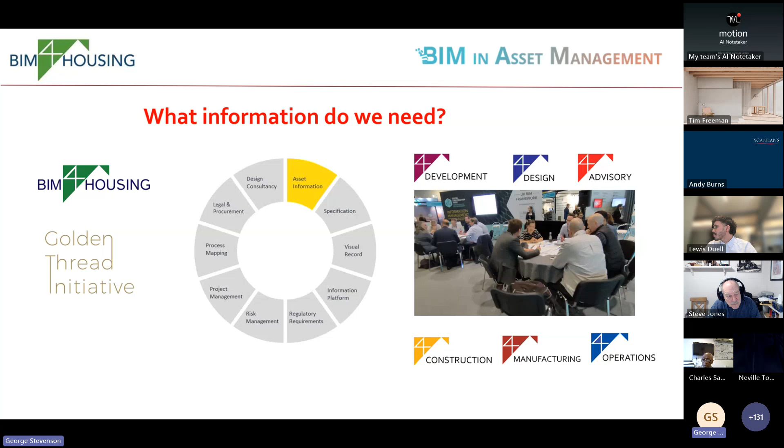So under those circumstances, we've run hundreds of workshops over the last 5 years, where we've got, for example, all those people around that table there are manufacturers. We've got designers coming together, but pretty well all of these have been done on Teams, and they're all recorded and up on the website. So if you're interested, that's the place to go. Very rich set of information.

One of the big challenges we've got with the new regulations is there's no explicit requirements, and that means we've got lots of experts having their different interpretations of things. So what we're really trying to do is make it so supply chains can get more consistent guidance, and we can do that through reusable data libraries.

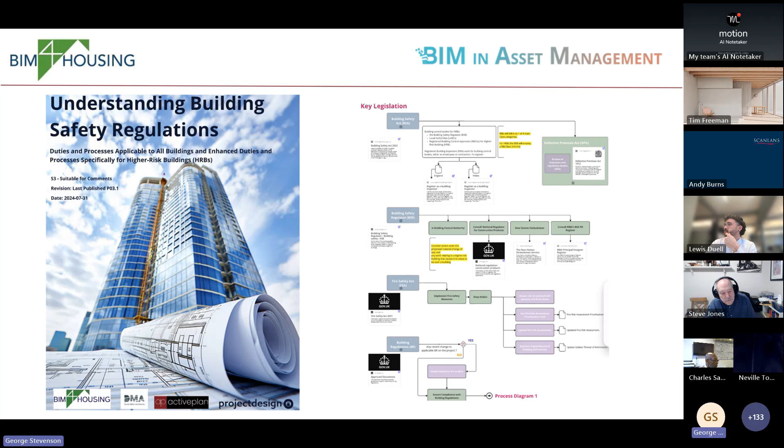What we've also done is set up, or the team has set up, a Miro board where you can go onto this and understand the regulations and also ask questions of the other experts. We've got basically almost 100 people involved in that. If you're interested in getting involved and using the Miro board, just put Miro in the chat and we'll come back to you on that.

What we also did, we used this methodology to identify what the assets are doing, what risks they're mitigating, what do people do to them to stop them from working, and what information we need to know about them. We did this on a deep dive basis for 12 key safety critical assets, and we've kept that information up to date, refreshing it every couple of years.

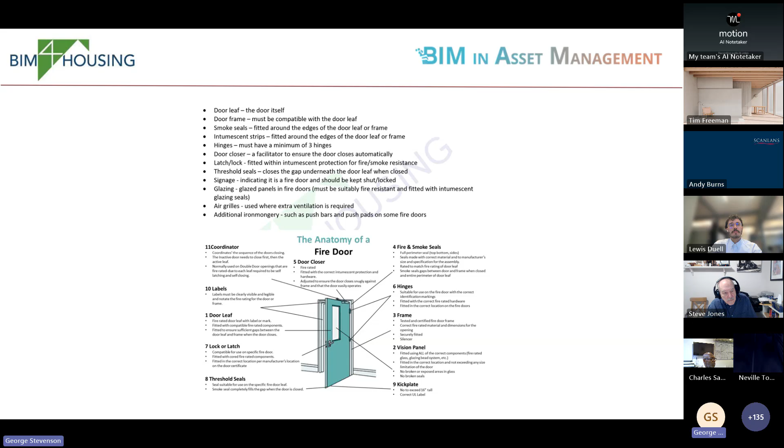We've just done it. We had a team working on that in September and October, and that's now been published, so that's up on the BIM for Housing website. The sort of detail we've got here is for each of the asset types - we've got fire doors, with detailed information that I think probably nobody else is providing.

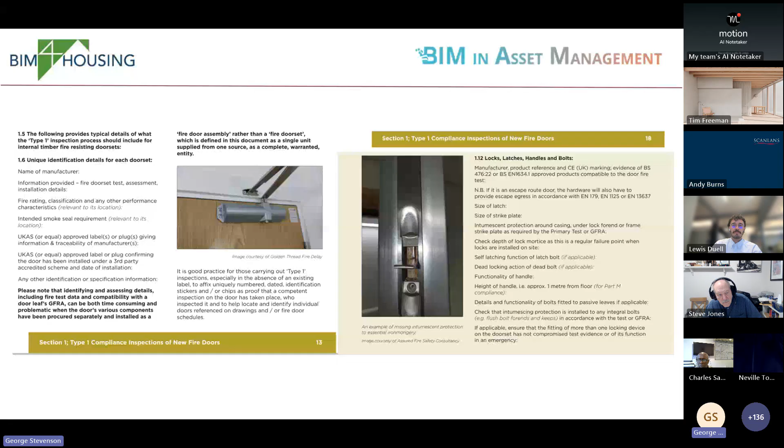What we've also done is looked at things that could be standardized, like fire door inspections, being able to identify in a standardized way what good looks like in terms of a fire door inspection. We've recently been working on the same for fire dampers, fire stopping, and cavity barriers. If you're interested in any of those standardized information sets, you can go and download them from the BIM for Housing website.

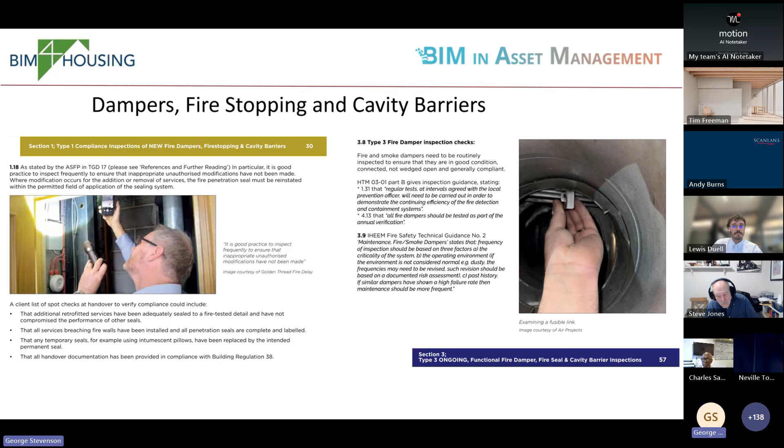But also, if you're interested in understanding more about how this glues together, I'm going to show you something now. One of the big challenges with most of these assets is knowing where they are in the building. We regularly find that even on brand new build projects, the asset teams have to send surveyors in to do manual surveys to actually identify where the assets are, and that findability is a big issue which we're trying to crack.

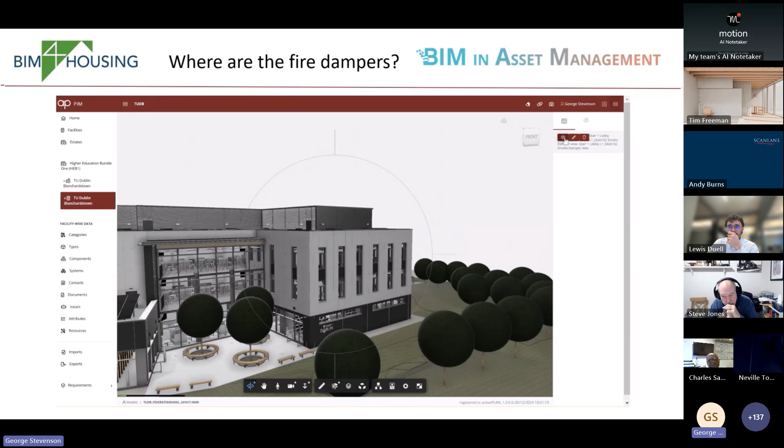So here, for example, we've got a few different software companies supporting the contractor and the asset team, and this is answering a specific question: where are the fire dampers in the building? We've got an integration with the Autodesk platform, and we've also got it integrated with the manufacturer's data about the individual dampers that have been used, being able then to identify both what the damper is and also where it is in the building.

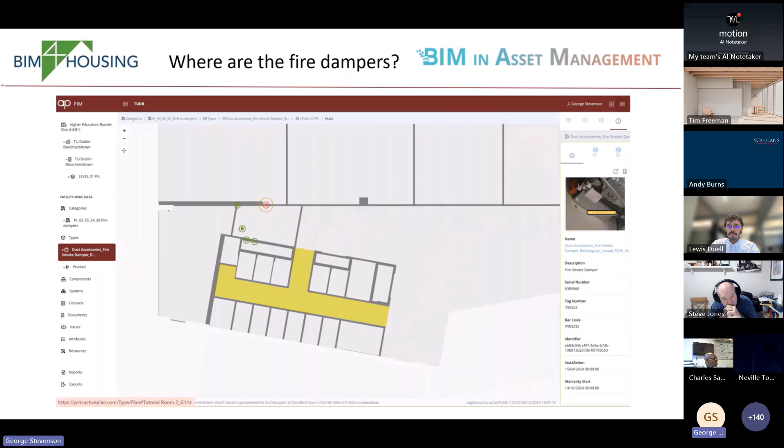So this is a very simple view of where that damper is, and by connecting it through to both the manufacturer's information and the asset information in the maintenance system, we've got something that can relate better from a compliance perspective. What we've also got is a link through to Open Space.

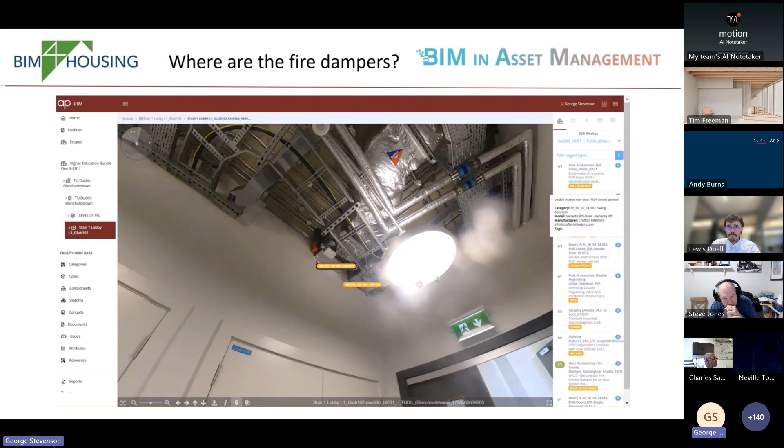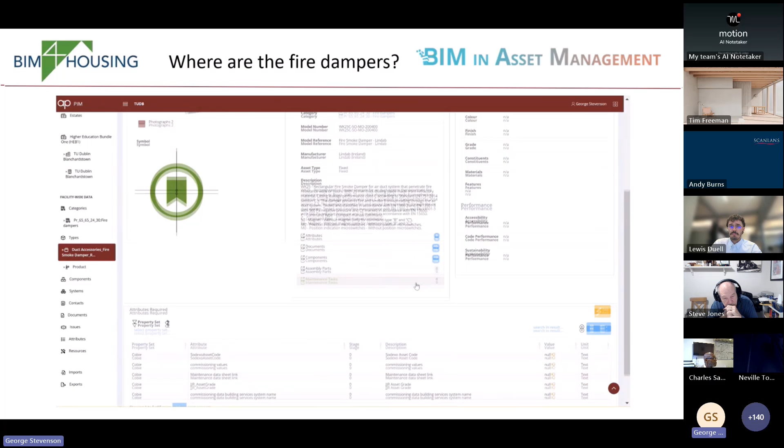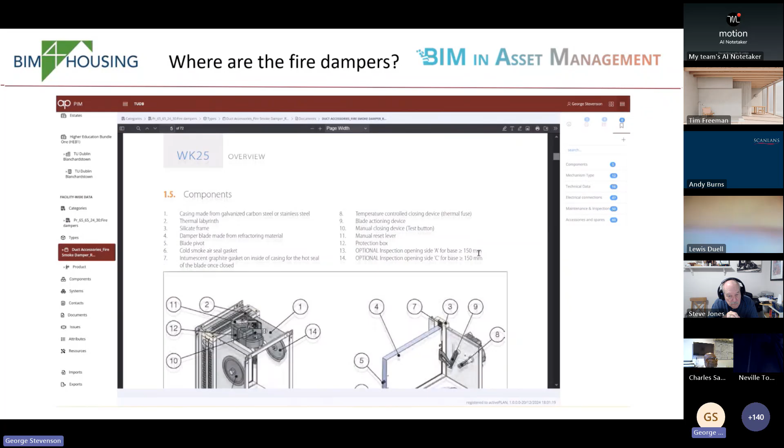This Open Space application captures 360 photography for construction purposes. Now we're really using it for asset management, so we're reusing the same information several times. We can also capture information that's been put into SharePoint for the O&M information, including the manufacturer's documentation, which we're tying back to product libraries that the manufacturers can then keep up to date themselves.

So the principle here is that what we're doing is capturing something once, doing it well, verifying it, and then making it available to be used many times. What we've now done is connect it back into SFG 20, which is the UK standard for maintenance tasks, so we're pulling all of that together.

So that's, I think, a good example of how we can bring together various different software companies and service providers to work in a joined up way. And that's the principle we've got with the Golden Thread Task Force. So I'm just going to explain that briefly.

The Golden Thread Task Force is to bring together a number of different software platforms and also people providing services - surveyors, contractors, people doing inspections - and they can then form tested solutions together. Therefore, clients and people that own buildings can come to them and bring together both the need and also what that solution is.

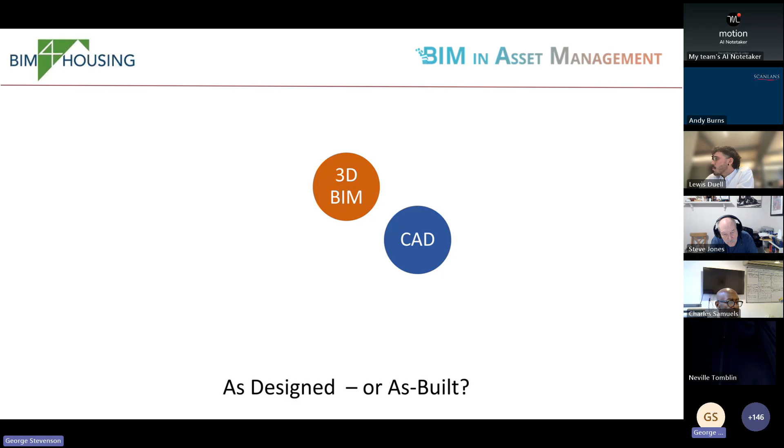The process we're operating is really trying to address the fact that most BIM models are as designed rather than as built. The challenge often is that if there's a BIM model and CAD data, the CAD data may or may not have come from the BIM model. You might have some COBie data, hopefully some good O&Ms, and maybe 360 photography. But the challenge is that they're not connected.

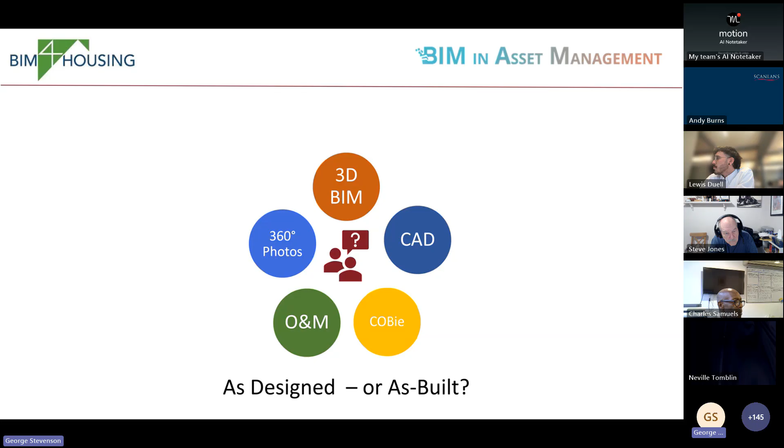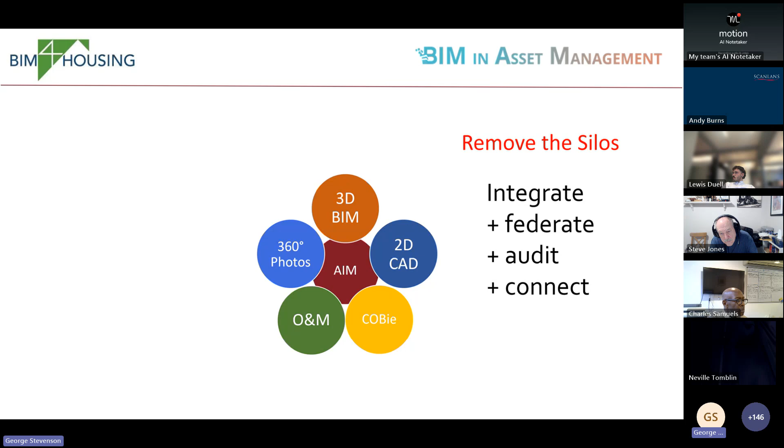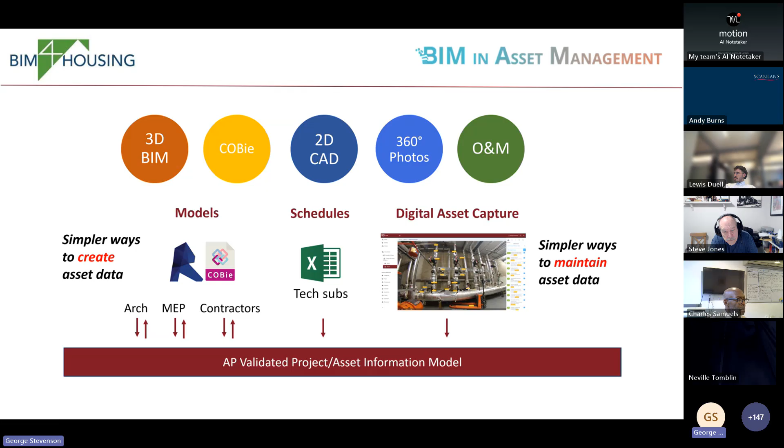That means the only way of checking that information is to do it manually, and the result is it often doesn't get done. So what we're doing is bringing those things together through integration so we can remove the silos and make stuff much more findable, joining up the information so it can be verified, maybe even using 360 photography, so it's quicker and easier to maintain.

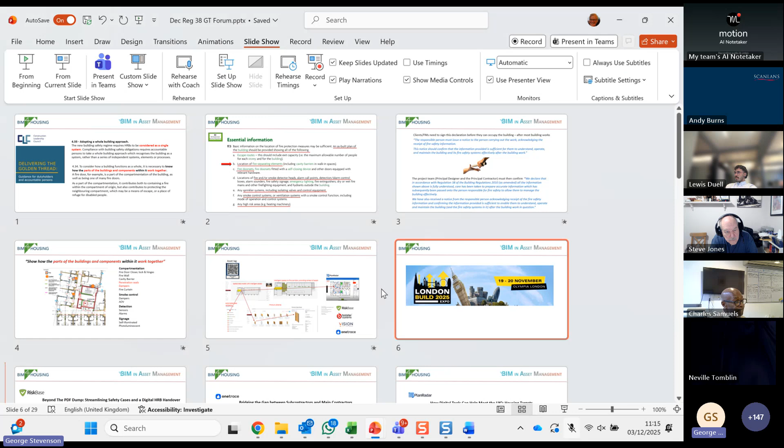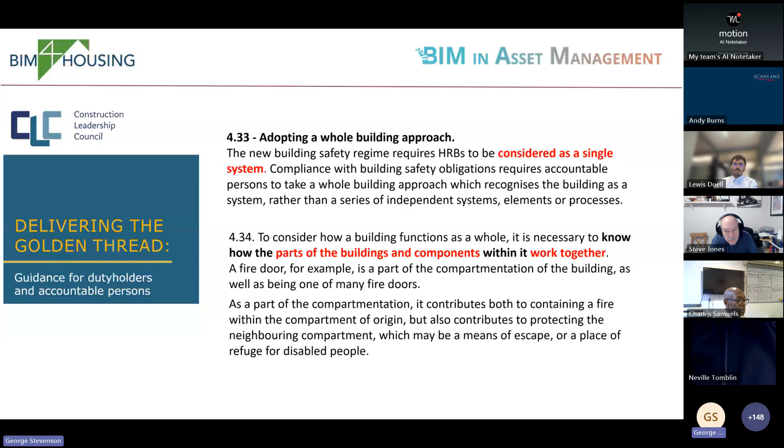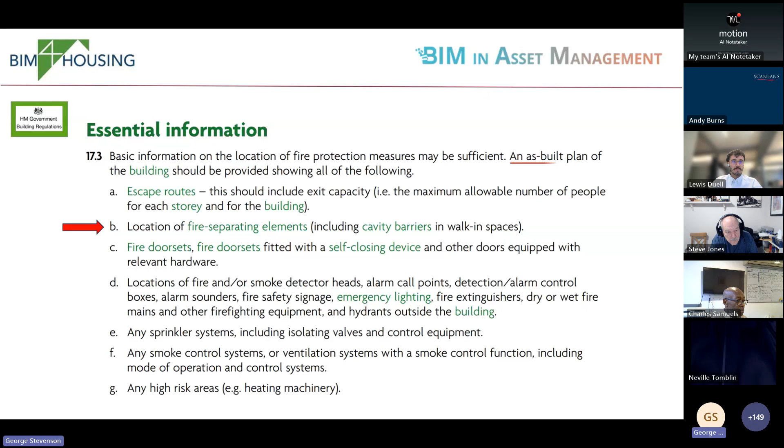I'm just going to skip on now to a case study. One of the big challenges is that a lot of this information coming through should be complying with the Golden Thread, which is really a concept of bringing together key information. Regulation 38, the fire and emergency file, is absolutely critical to the safe management of the building, but a lot of people don't appreciate that by law, the landlord has got to sign to say they've received it.

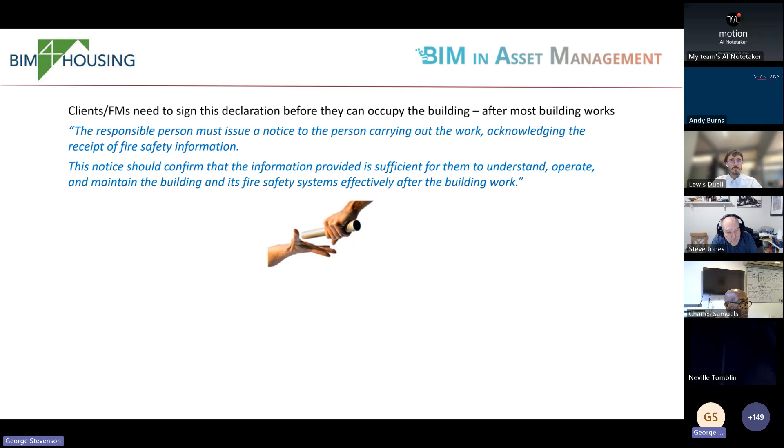The landlord has got to sign to say that they've received it, and the contractor has got to sign a declaration to say that they provided it. We're certainly finding that's not necessarily really happening. Now, why is that important?

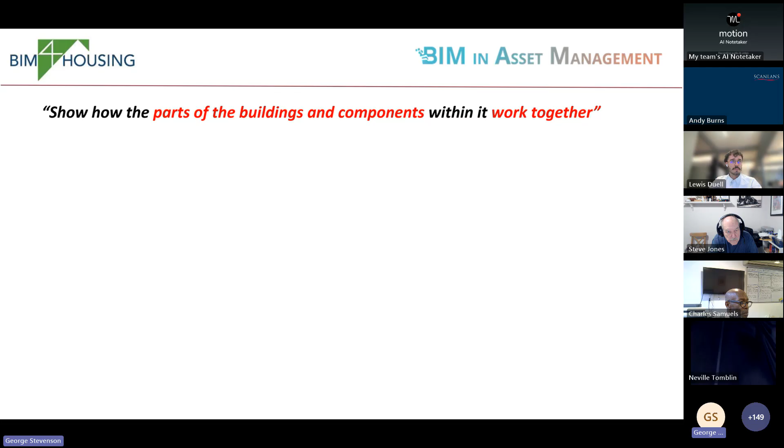Well, in this situation, for example, a fire breaks out in a kitchen, smoke is being generated, and we're trying to make sure the smoke doesn't get into that stairwell. The way of protecting against that is through good compartmentation. That doesn't just mean the fire doors have got to be good, it means all of the other things that go to make up that compartment have got to be sound. We've got to assume that something will let us down, so we need good smoke control systems, detection systems, and signage to get people out of the building.

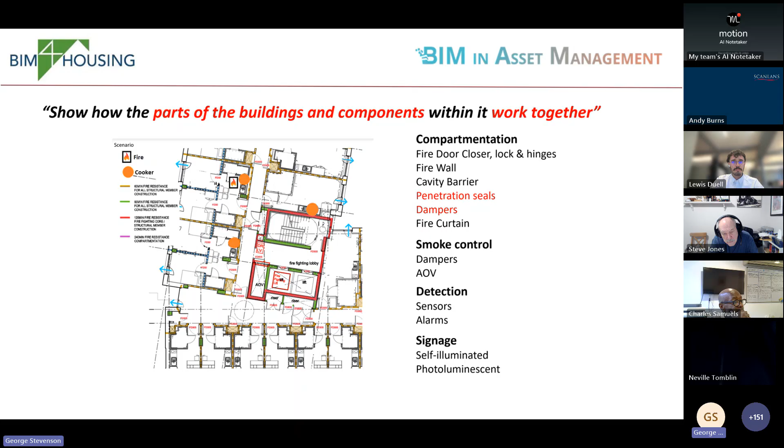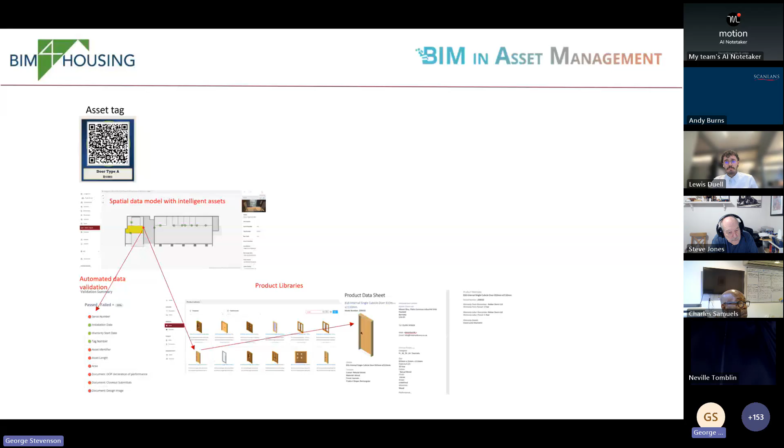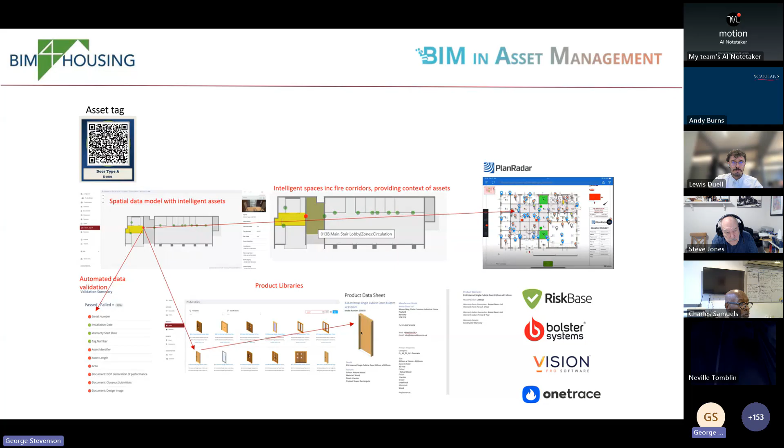The challenge is that all of that can often be quite disconnected. We may have a BIM model with really good product information, but the important thing is that a space like a stairwell is properly protected by the various assets that make up the compartment. There may be a range of different software applications used to audit and keep that together, so we're trying to find ways of getting those applications to collaborate and share information about the assets being inspected.

What we've managed to do is get a lot of collaboration now. At London Build, we had RiskBase, one of the leading inspection applications certainly in social care, and we ran a workshop with them. We also did one with one of their major competitors, OneTrace. For PlanRadar, for example, we had 200 people or so in the audience at each of these workshops.

One of the common questions we asked was, have you had a Regulation 38 pack of information that's satisfactory? There's been some real challenges with that, so we're going to be asking you a question on that in a moment.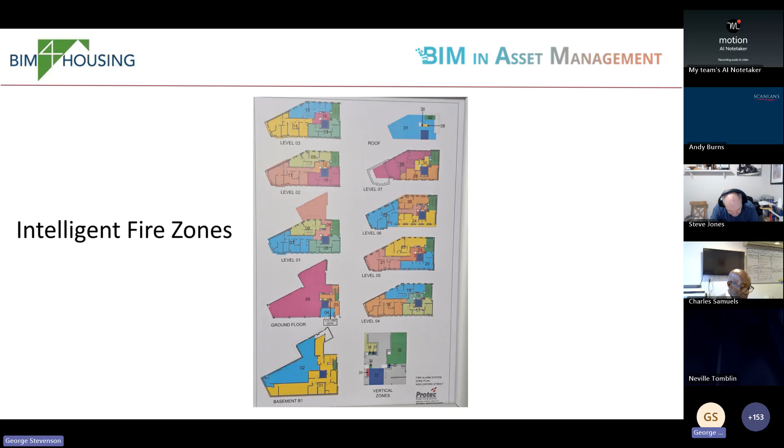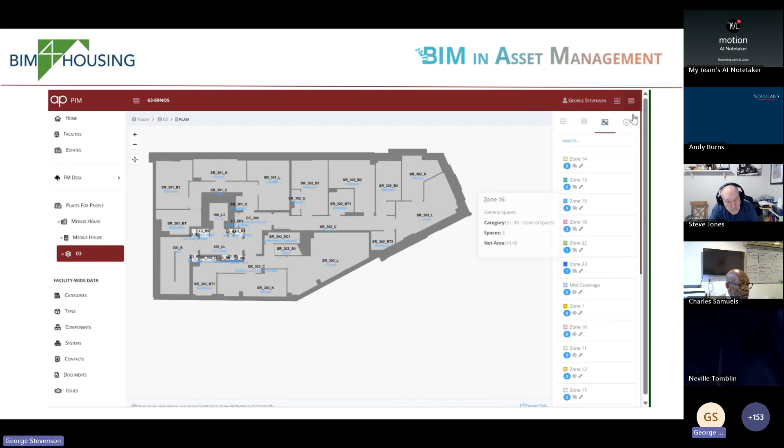The purpose of bringing together all of this information: here's an indication where we've got a BIM model, and we're tying it back to the fire plans and the fire strategy. Each of the spaces is part of a fire compartment, and we're then able to actually see that fire compartment in the context of the rest of the building. We're also bringing in information captured using a different software application called Boris.

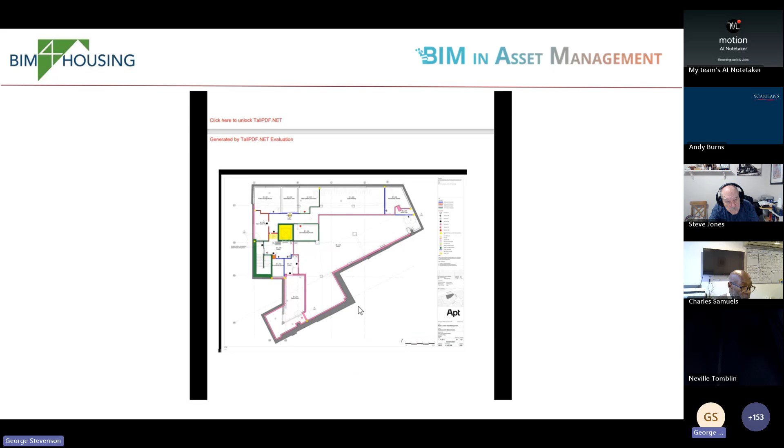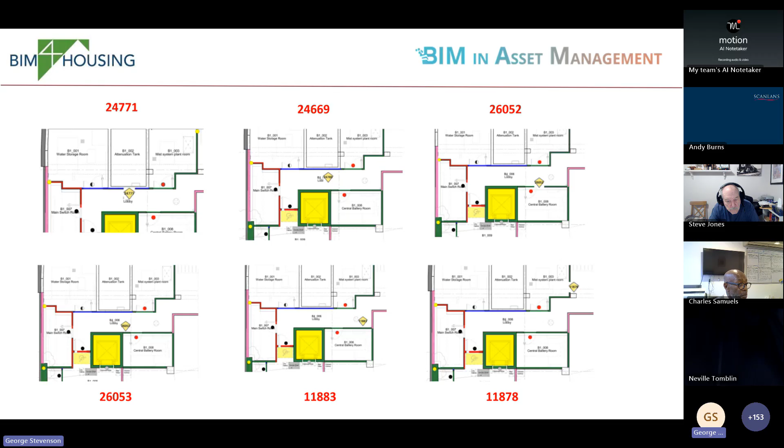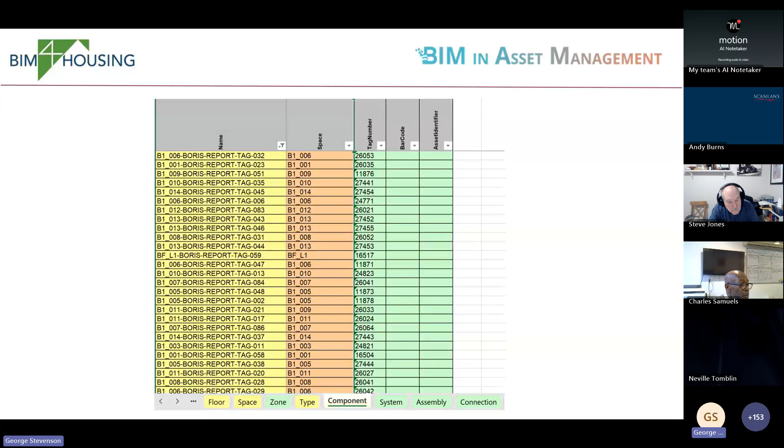There's really good information about where the fire stopping's been installed, but it's just a document, just a PDF document. So rather than the engineer or the FM having to open up hundreds of different drawings to find what's been installed, we've interrogated that and pulled the information for each of the assets and their coordinates into the database, so we can then see where those fire stopping assets are.

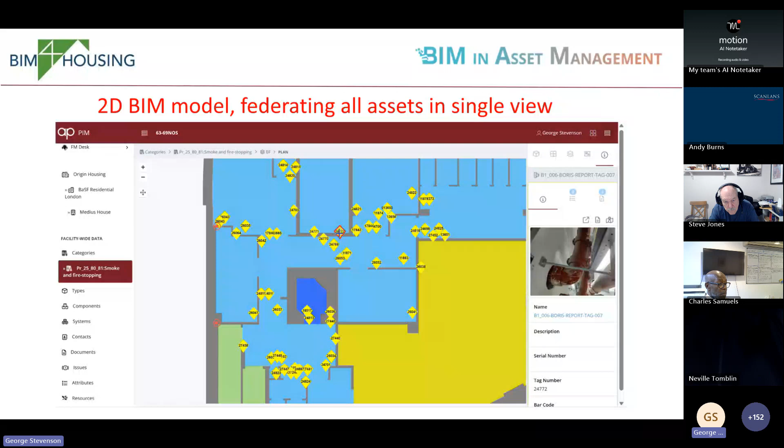So we're turning it into intelligent data that can then be interrogated, so the information captured during the inspection can then be used by anybody else who has a need to maybe do checks and things.

And part of this process is to bring together people doing different types of inspections and working up a retrospective fire strategy, for example on existing buildings, because it's highlighted the fact that many buildings don't have fire strategies.

What I'm going to do is just skip back to Richard - skip back to what the law actually says you've got to provide. And this is where I think there's a lot of misunderstandings. There needs to be an as-built plan of what needs to be done. So if people could answer that - have you ever received a complete, and it's important, a complete and audited fire and emergency file?

Do you only want people to reply who should receive those files? Well, if you're involved and would know whether your organisation has received a complete file, then answer it. Or if you're responsible for supplying that file.

I'd like to see a 'don't know' option, because I would click don't know. I get Reg 38, but is it full in its entirety? Have I got what I'm supposed to have? Well, I don't know what I'm supposed to have. For the purpose of this, if you don't know, then I put no. I agree it should have been on there, but for the purpose of this, I would put no, if you don't know whether you have or not.

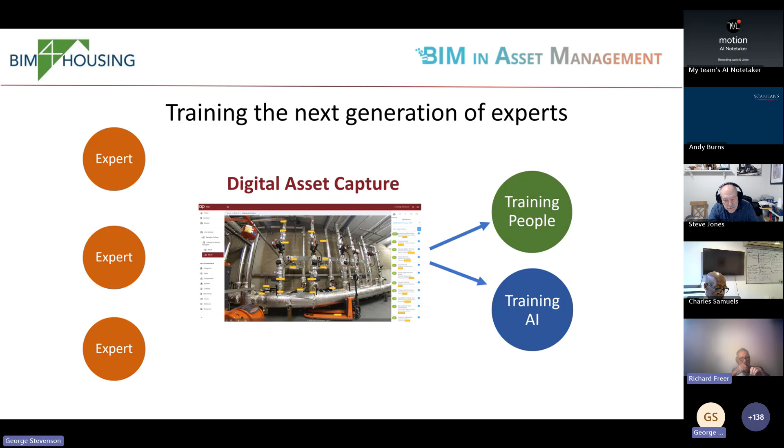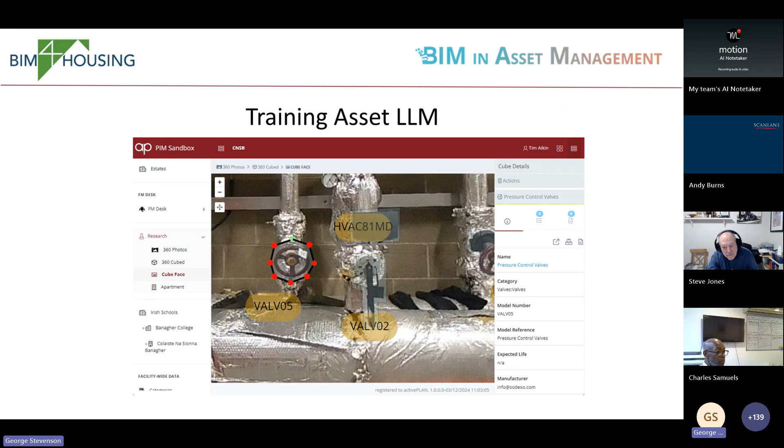So what we've been doing is looking at how we can use smart technology to add intelligence into BIM models. For example, if we've got 360 photographs, one way of doing that is to get people with a lot of knowledge about what they can see in those 360 photographs, which are the as-builts, and use that to train new people, but also to train AI. So one of the things we've been doing is using this to capture information about what an expert sees - that valve is - and using that to train large language models to identify those things. Now that's not easy, we're not saying it's cracked yet, but we're well on the way.

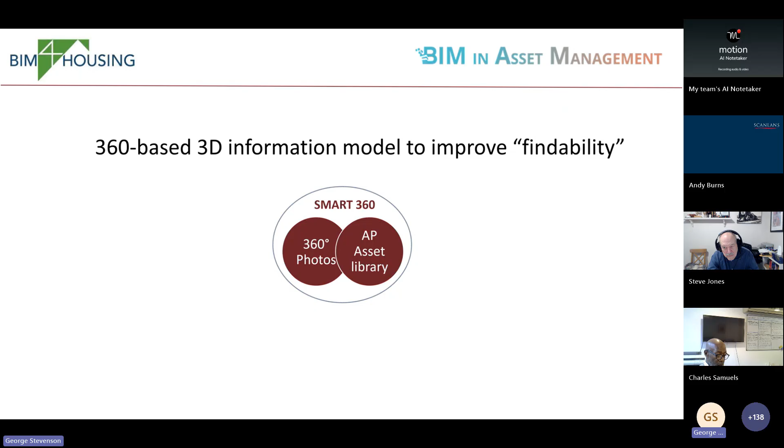Also, being able to bring together 360 photographs and turn them into intelligent asset data - that's what that does. We end up with a smart 360 photograph, so the 360 photograph makes things more findable. It also means we can connect it back into other processes. We can tie it back to various different technologies capturing the 360 photos, and relate it back to the many great software applications used during construction. Remember, this is BIM in asset management, so we need to look at what the steps are to bring that about, so we've got a coherent set of information.

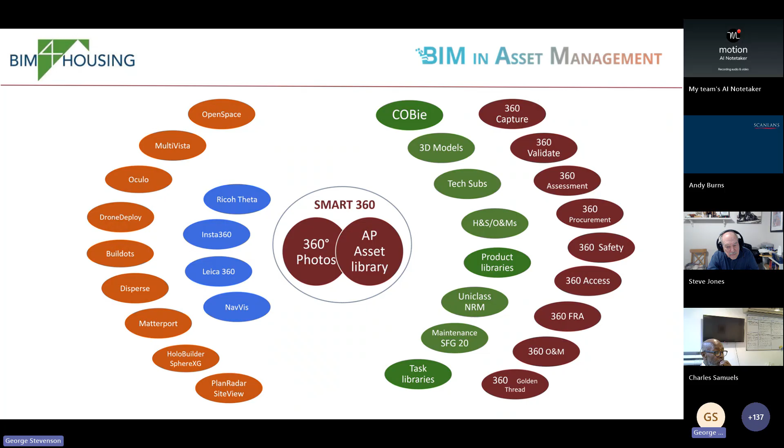I'm now going to introduce another company specializing in this area. They've come up with a very interesting and novel way of integrating the network side of things into the wider process.

So Aleksandr, well, actually the two people we've got on the call, it's quite interesting - Aleksandr's joining us from Hong Kong, and he's 8 hours ahead of us. So Aleksandr, are you there? Yep, sure, I'm here. Great. Could you, just whilst I'm setting your thing up, explain briefly what your technology is doing?

Yeah, absolutely. So our basic idea is to connect the control logic with the 3D model and BIM model, and to make it in a smart way.

So George, if you could run the video, it will be much clearer after that. Yeah, for some reason I can't find the video. Sorry, one second. Have you got it? Yeah, no worries. Could you do it and share it please? Make sure. Absolutely, yeah, carry on.

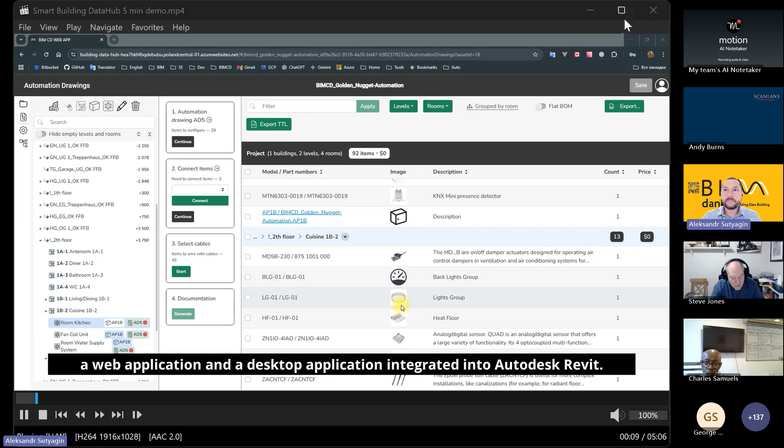The desktop application is integrated into Autodesk Revit. In essence, they function as a single unified application. It is possible to import architectural entities from Autodesk Revit for use when placing technological equipment and automation devices. However, these entities can also be created manually.

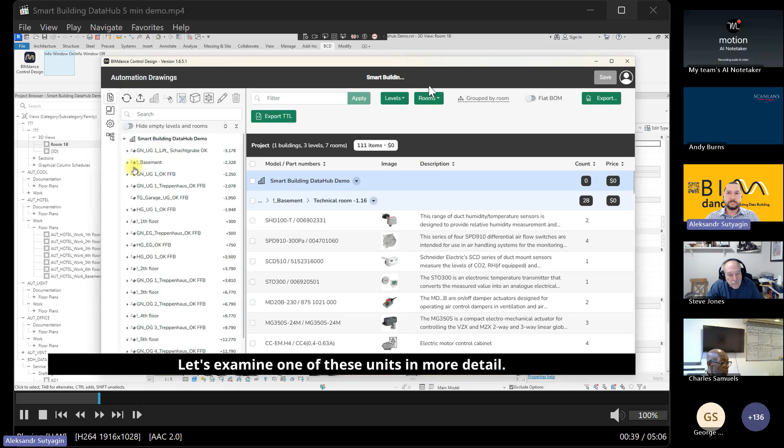Let's switch to the desktop application for a more detailed overview. Technological units and automation components are placed within a tree of architectural entities. Let's examine one of these units in more detail. A unit is a fully customizable entity - every element within it can be configured according to the user's requirements. A technological unit can contain both automation devices and any other required technological elements.

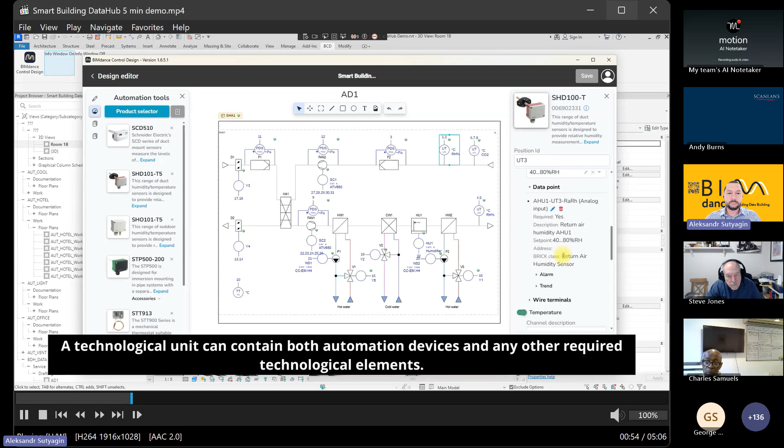For example, let's place a sensor inside the air duct of a ventilation unit. We simply take it from the catalog and move it to the required position. As a result, the device, together with all its internal complexity, becomes part of the project and is ready for further use.

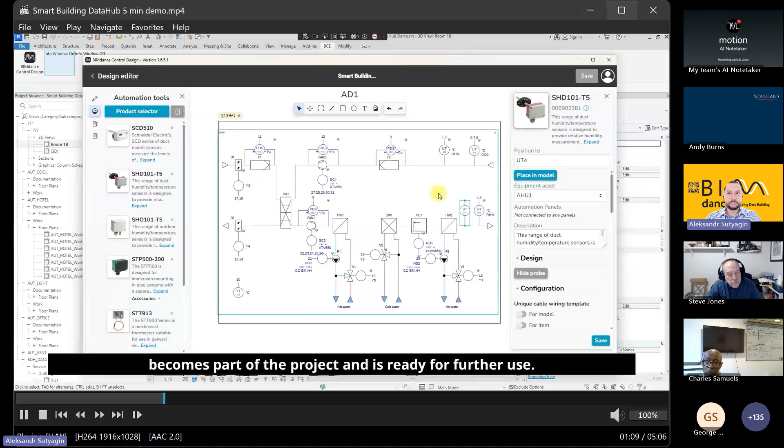Now let's look at the level of detail available when modeling an automation device, using the example of an actuator for a control valve. Here you can see a selector that allows you to quickly locate the required device based on defined parameters. For example, let's consider this actuator.

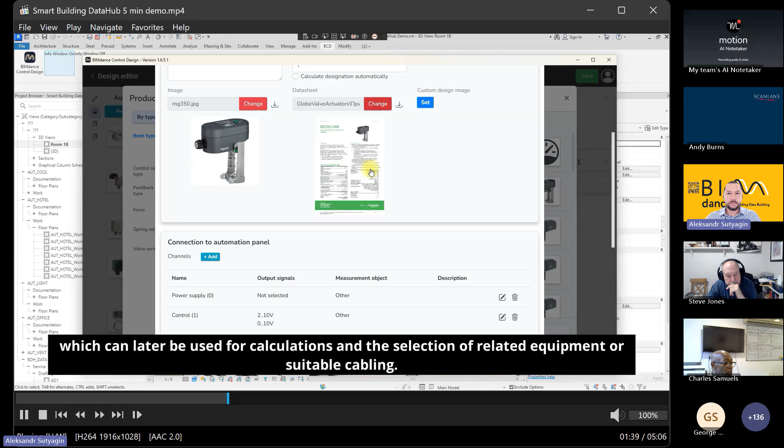At the top of the form, we see a set of the actuator's basic fields. It is possible to specify more detailed information about the actuator, which can later be used for calculations and the selection of related equipment or suitable cabling.

Below this, we see information regarding the actuator's connection terminals and their purpose. These data are used for the automatic selection of PLC control modules and for generating detailed wiring diagrams. Further down, we also see a list of valves compatible with this actuator, which can likewise be used in equipment selection algorithms.

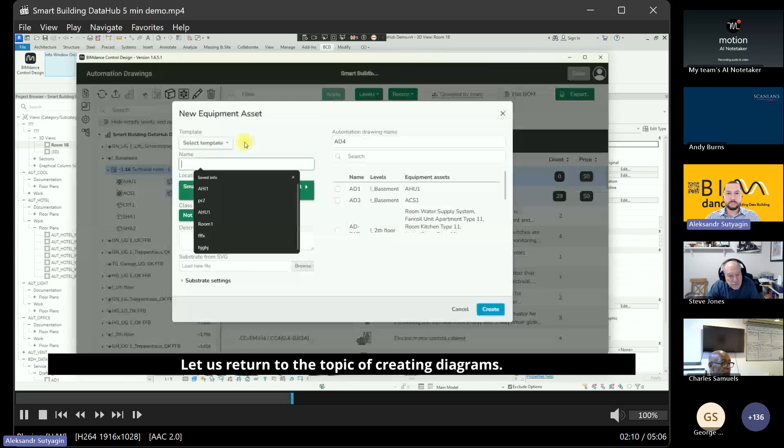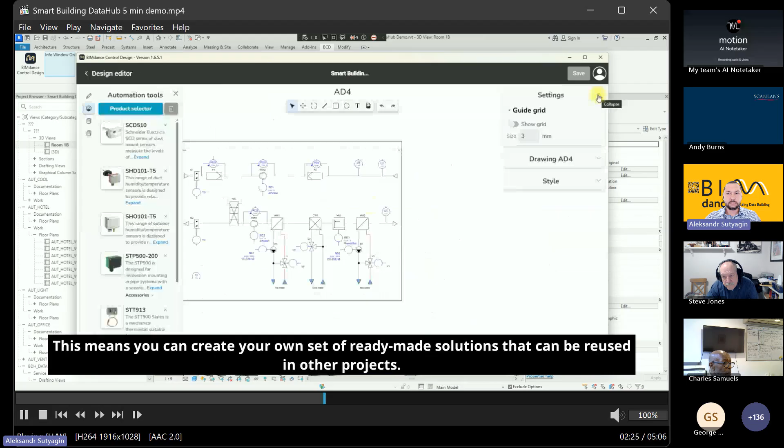Let us return to the topic of creating diagrams. There is no need to design a technological unit diagram from scratch - you can use the catalog of standard design solutions and select one that suits your task. The catalog can be expanded by the user, meaning you can create your own set of ready-made solutions that can be reused in other projects.

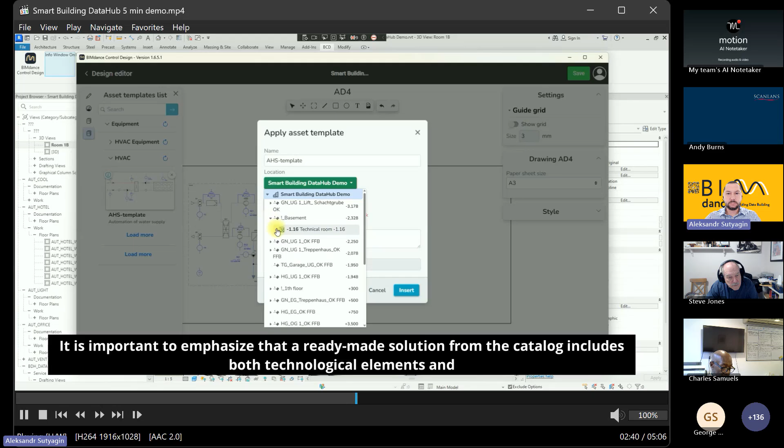You can use a template solution when creating a new diagram or add it to an existing one. It is important to emphasize that a ready-made solution from the catalog includes both technological elements and automation devices. The template also contains all other necessary data. In essence, it is a fully prepared part of the project.

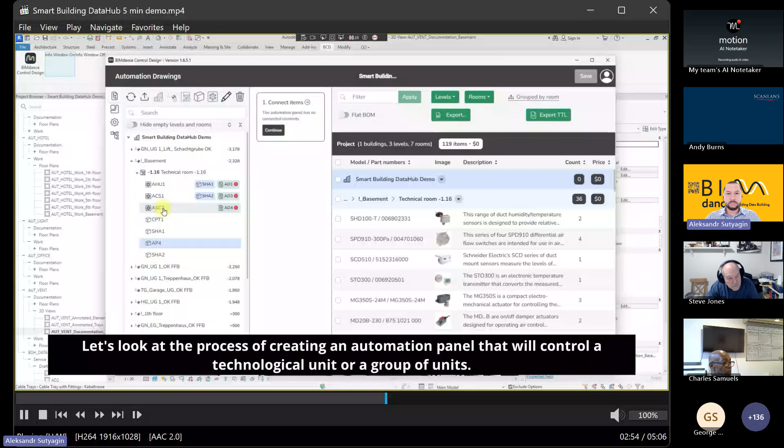Let's look at the process of creating an automation panel that will control a technological unit or a group of units. To do this, we need to associate the technological unit with an automation panel, either one created specifically for this purpose or an already existing one. Let's select a new panel from the list.

We can define a new PLC or use the default controller. Let's consider the second option, as it is the most commonly used. To connect automation devices to the panel, all we need to do is drag the required technological unit, together with all the contents we previously created in the schema editor based on a template, into the desired panel.

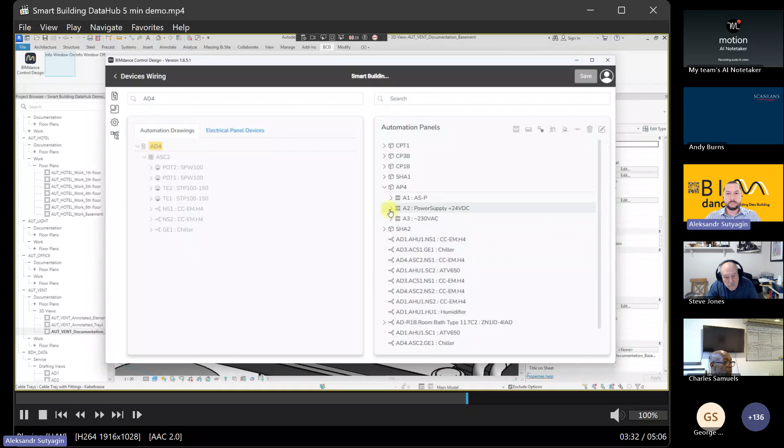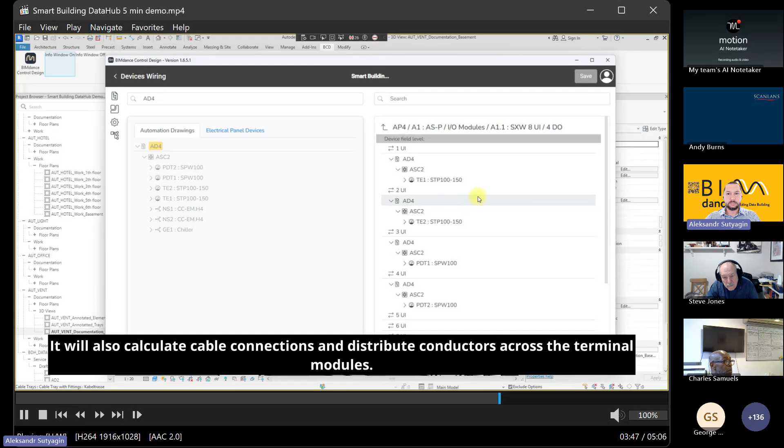After saving, the following will occur: the system will calculate the required number of controller expansion modules and related devices, such as power supply modules, terminal sections, terminal blocks, and much more. It will also calculate cable connections and distribute conductors across the terminal modules. As a result, we obtain a fully prepared automation solution for controlling a technological unit or a group of units.

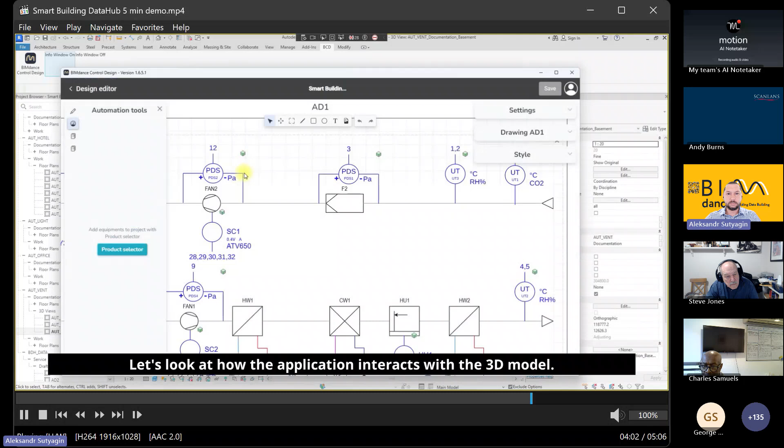Let's look at how the application interacts with the 3D model. All equipment placed on the drawing is represented in the 3D model, and there is a bidirectional link between the model item and the schematic item.

We can select any element in the model and view its project data, its ID, which automation panel it is connected to, and which cable is used. We can also remove a device from the model and place it back again if needed.